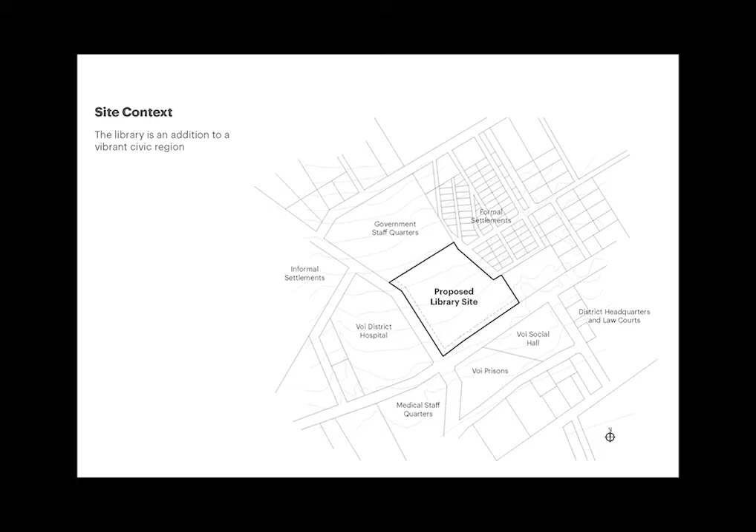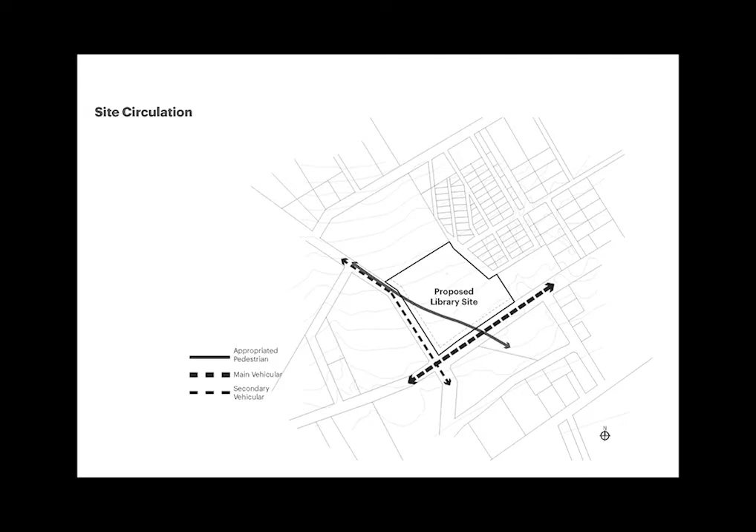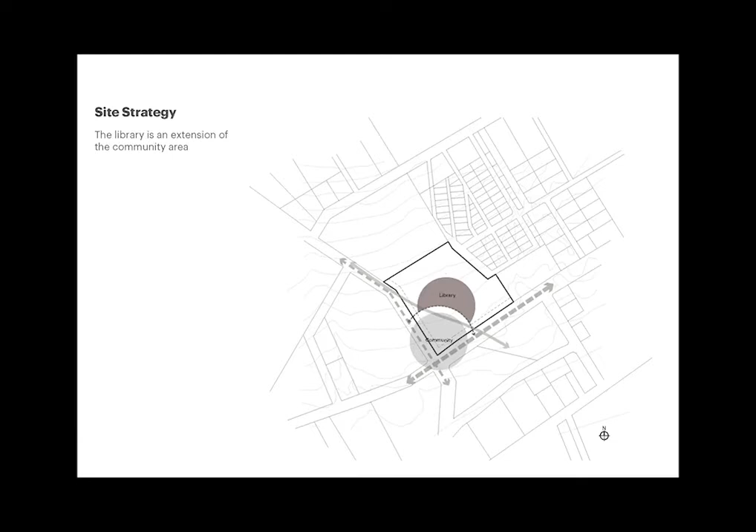The site lends itself into a heart of civic activities, and the library can only add to an already rich administrative area. The site is well fed by planned vehicular circulation as opposed to pedestrians who have appropriated the site by creating informal paths right across it. The library aims at embracing this appropriation by letting the community be part of it through hosting community functions and linking it to the rest of the world.

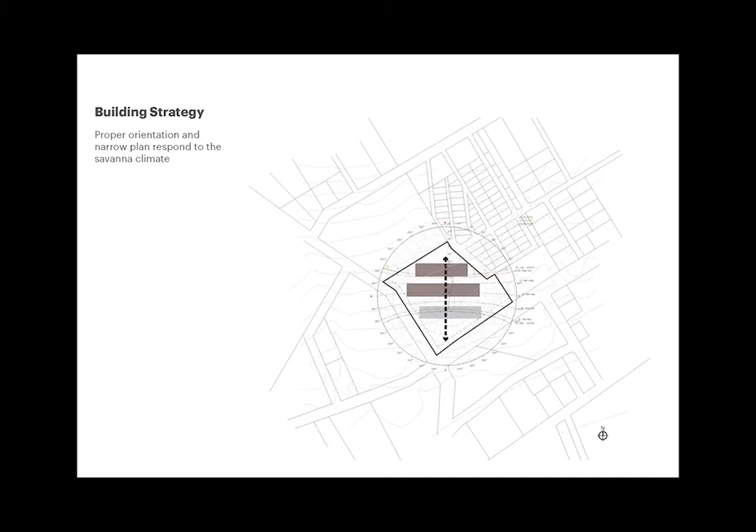In response to the hot and dry savanna climate, the building is oriented east-west with a narrow plan allowing for deeper penetration of light and ease of cross ventilation. So the library today wants to be less of the traditional library and more of a community space.

The community living room ensures that the library is not just a knowledge generation and absorption area, but also a leisure and recreation facility. So apart from the traditional library spaces, the facility hosts community spaces like barazas, amphitheater, auditorium, exhibition spaces, and even utility shops. It has a series of small courtyards that lead into larger courtyards with varying programs all through.

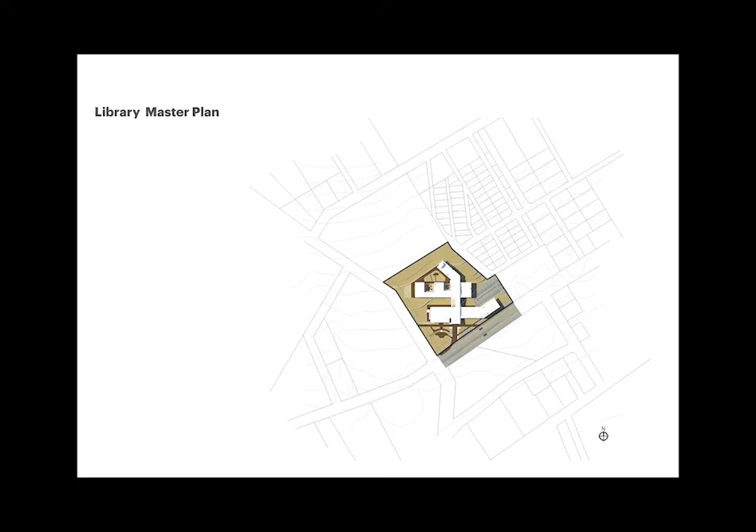High ceilings and detached roof reduce heat gain by the library spaces. Solar chimneys enhance ventilation by pulling hot air out of the spaces. East and west facing facades have windows turned to face away from direct sunlight.

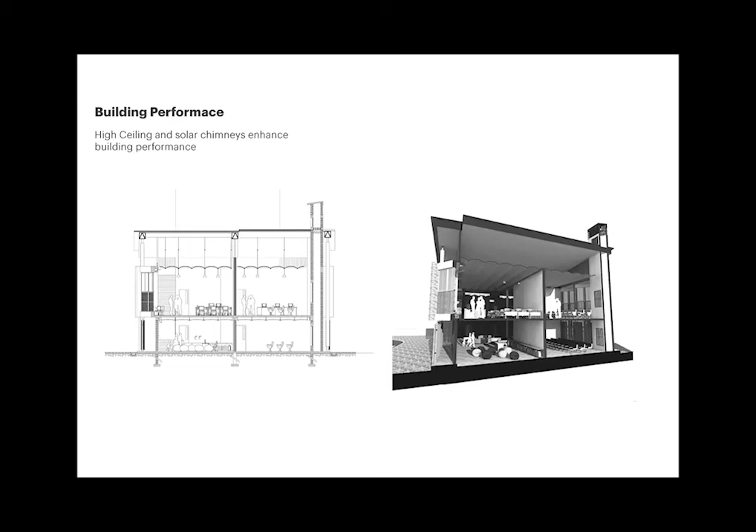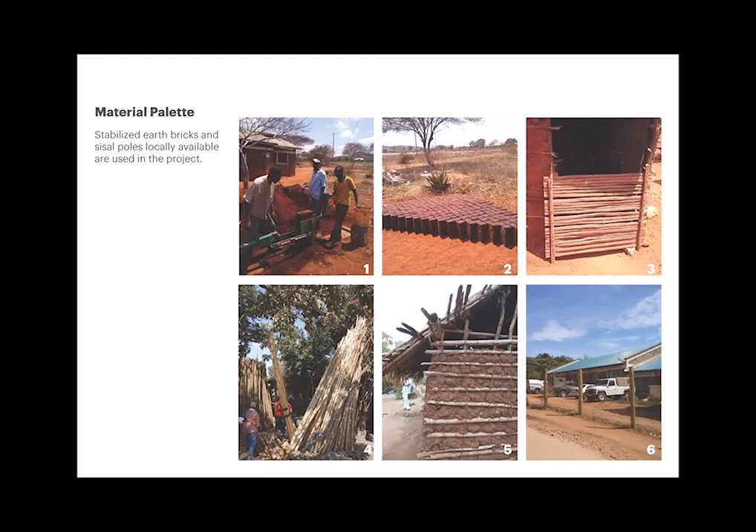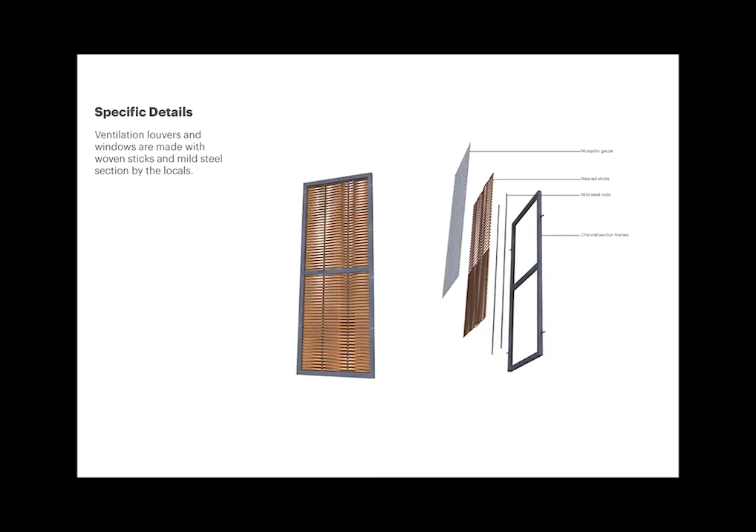The library intends to use locally fabricated stabilized earth bricks. Ventilation louvers, doors, windows, and seats are typically made of wattle and sisal poles, and as much as possible, local technology is employed in construction. Ventilation louvers and the windows are made with woven sticks and mild steel sections by the locals.